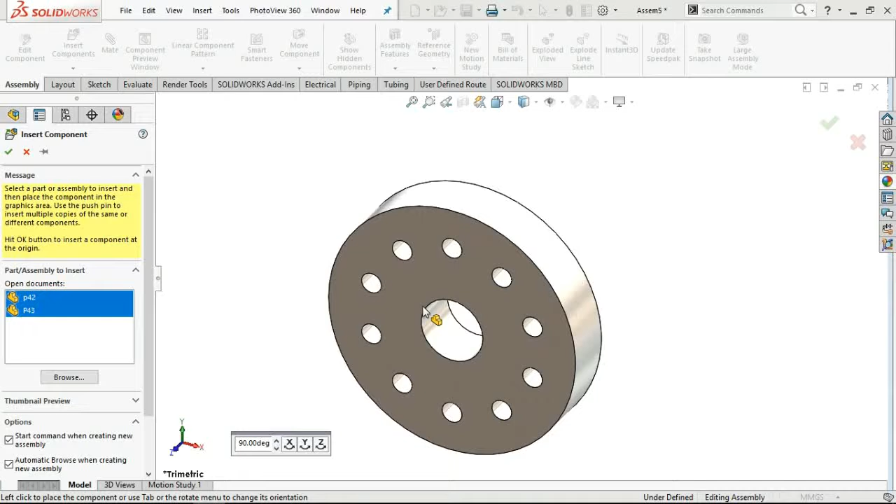Now I'm going to show you another command, or trick, in Assemblies: sub-assemblies and Treehouse. First I'm going to show you how to use sub-assemblies and how they can help you when assembling different bodies.

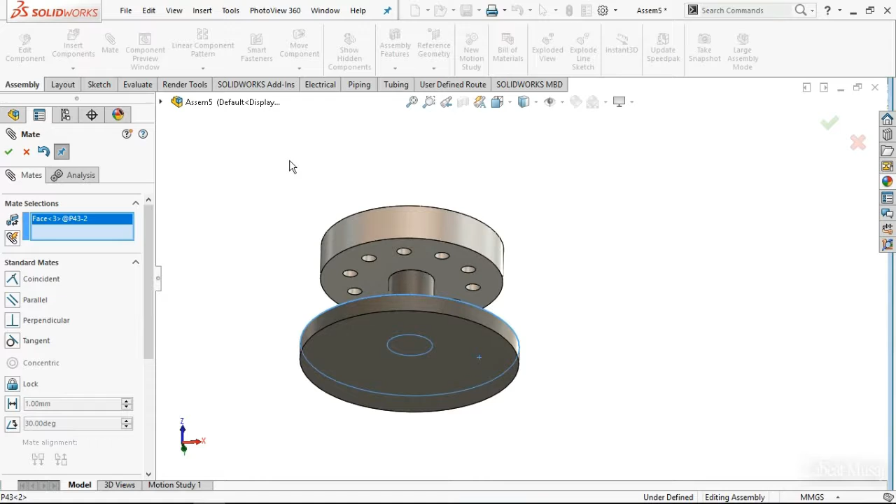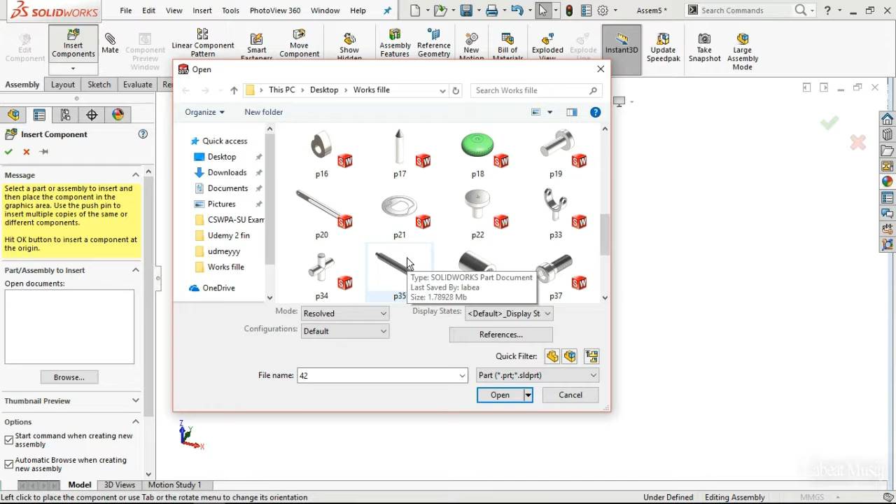So I just inserted these two parts and now I'm going to mate them. Just click the inner part and the outer part of the cylinder, and now I'm going to mate these two faces. This is all done.

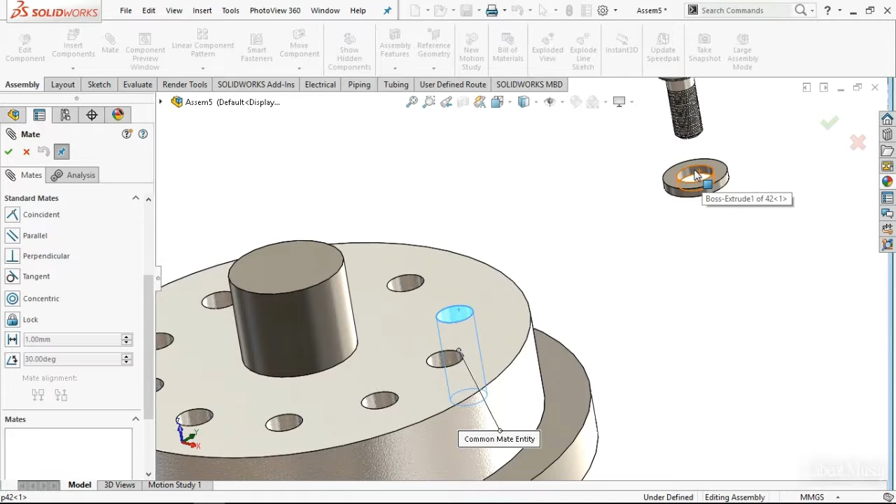Now I need another part, or two other parts. So this would be it, and the other one is a bolt. Now I'm just going to insert these two parts, and what I'm going to do with them is mate them and assemble them with the existing bodies on my working sheet.

So this is the first way you can do it. You can just mate these bodies one by one, and after this I'm going to show you how to use sub-assemblies and how they can help you. So I'm just going to mate these bodies one by one.

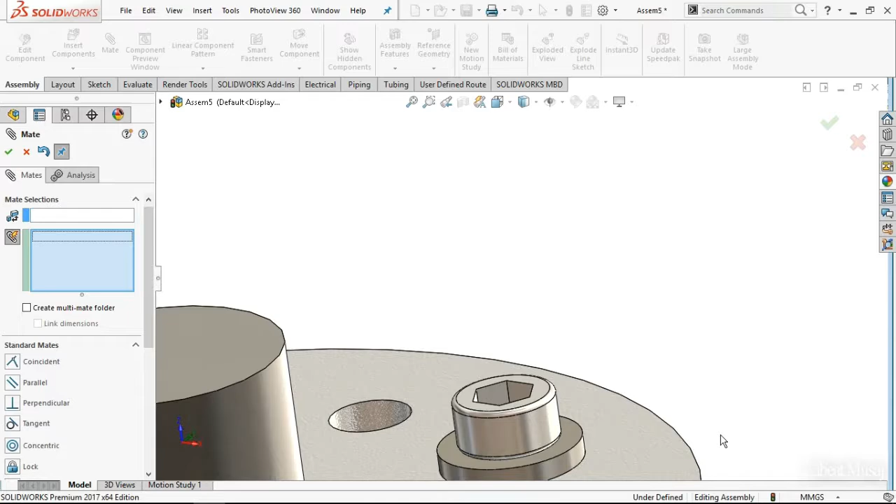And now these faces. So now we have these parts, and I'm just going to assemble them with these tiny holes that we have.

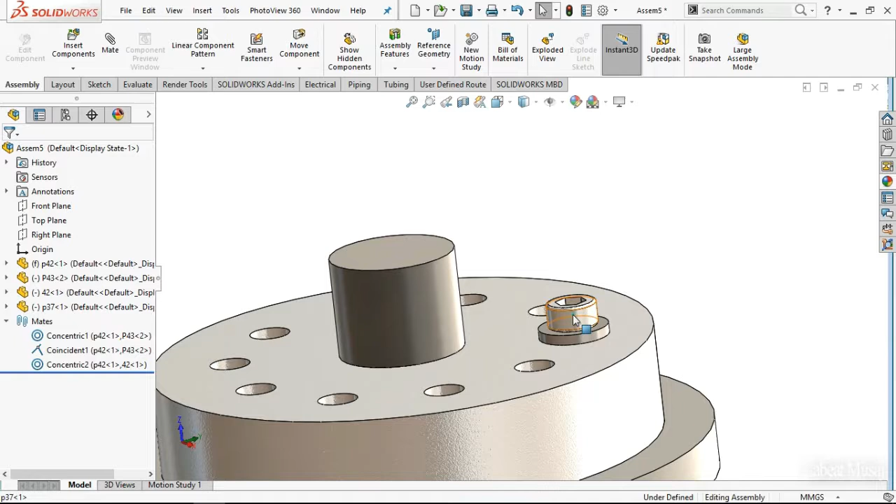Now I'm just going to delete these mates so I can show you how to use the sub-assembly part. Now I'm going to separate these - let me delete this one too. Now they are not mated, they are kind of independent.

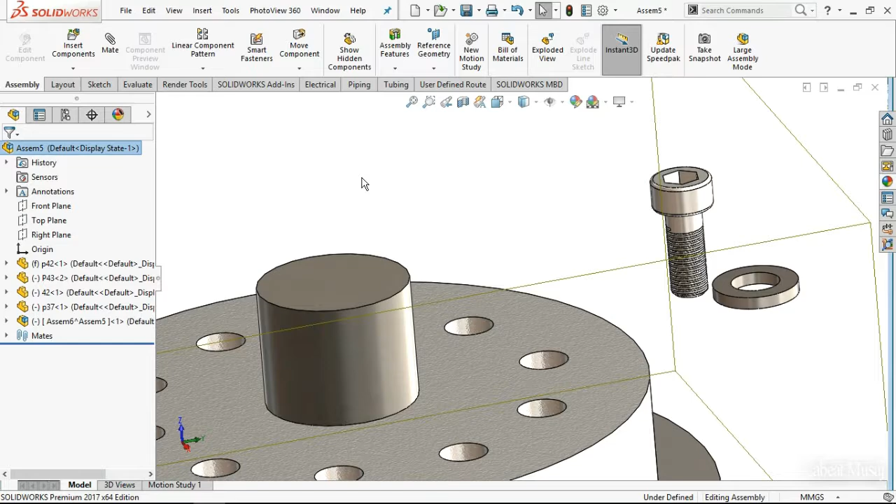So what you can do is first create a sub-assembly with the bolt and this small cylinder, and then you can just insert them in the main assembly.

So what you've got to do is just select the parts, this one and this one, and then drag them down to the other assembly. So this is pretty easy.

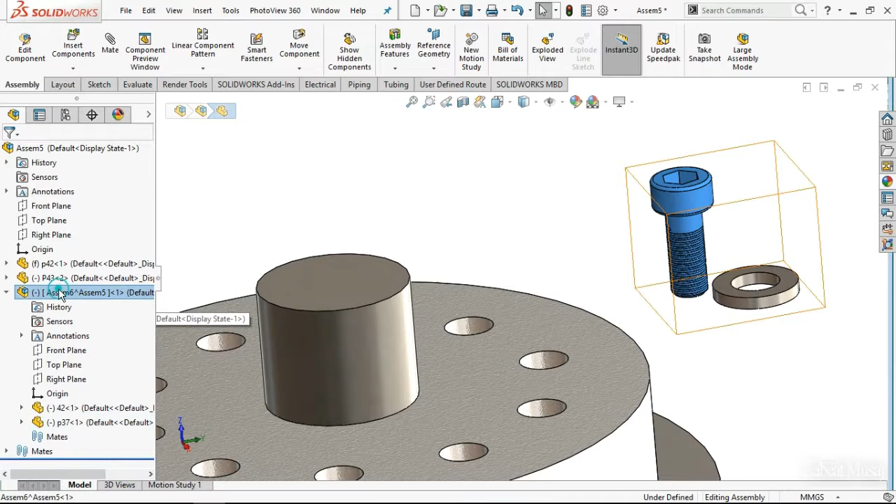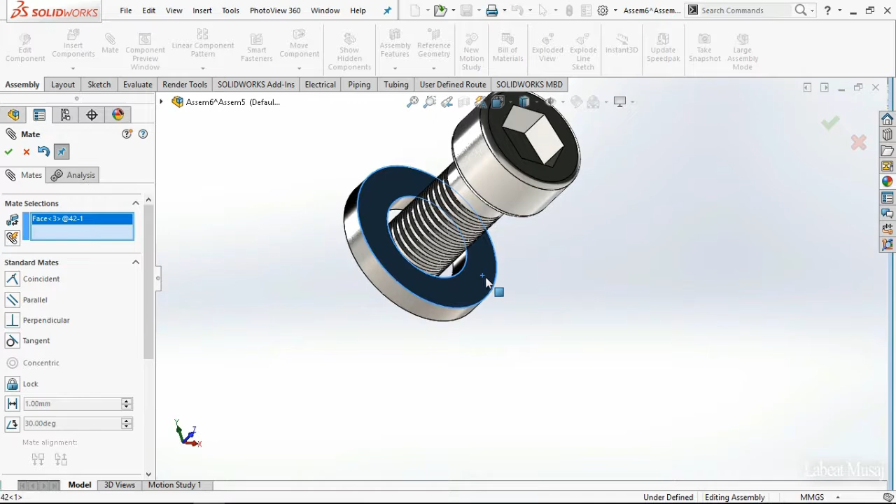Now you have these two parts, and what I'm going to do is just open the sub-assembly. So now we have a sub-assembly here, and I'm just going to mate these two. So this is basically it. Another one.

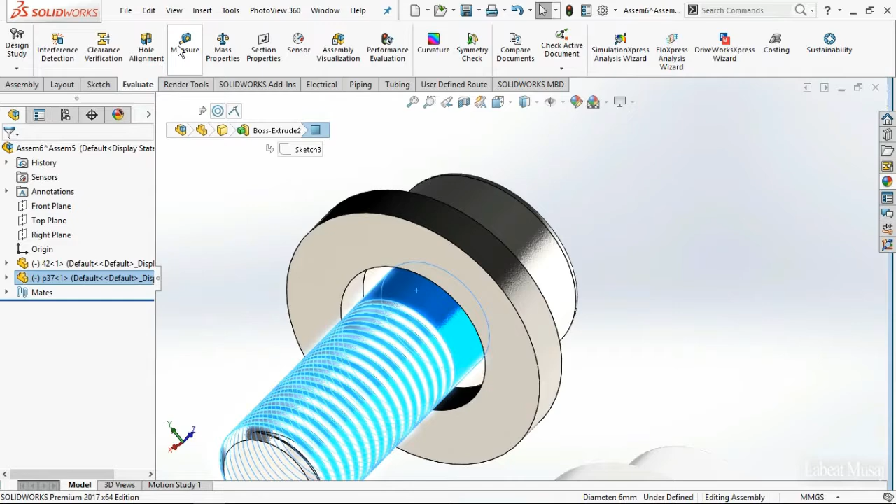As you can see, the size doesn't correspond, so let me change the inner diameter. I'm just going to measure how much this diameter is - it's 6 millimeters.

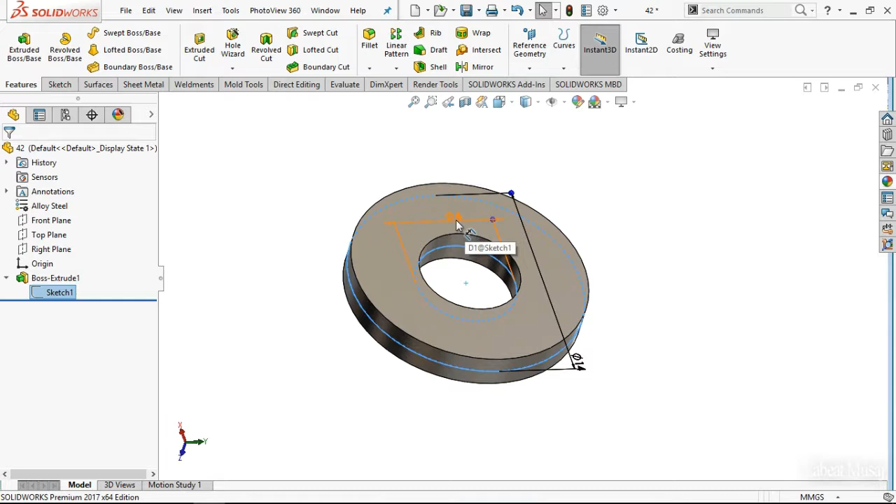Now I'm just going to edit the inner circle by editing the sketch. Now we just go rebuild and it's all done. You could change the dimension here as well - it's your choice, you can change it however you like.

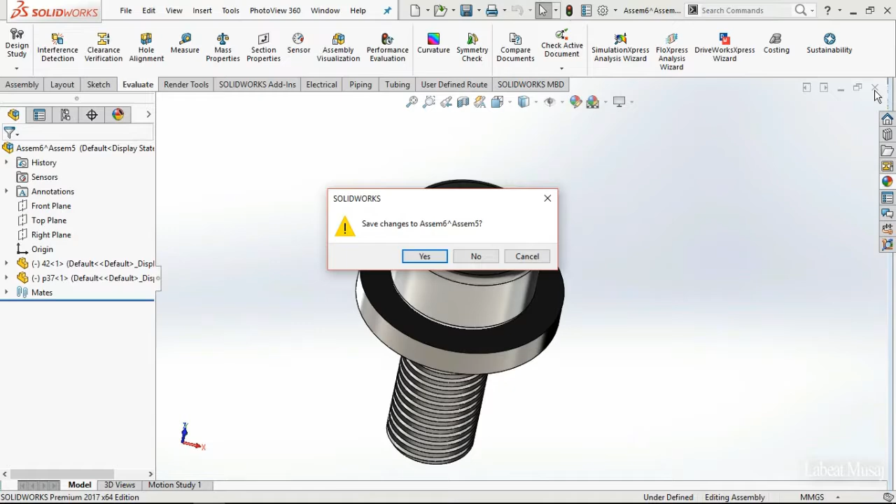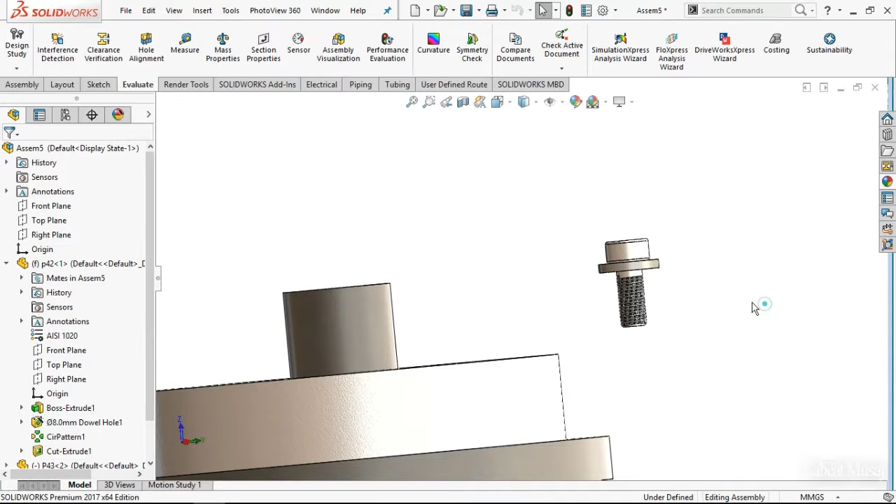So now we have this sub-assembly, and I'm just going to save the changes. What I can do now is assemble these parts that I assembled earlier with the main assembly. So I'm going to mate these holes with the bolt parts with a screw.

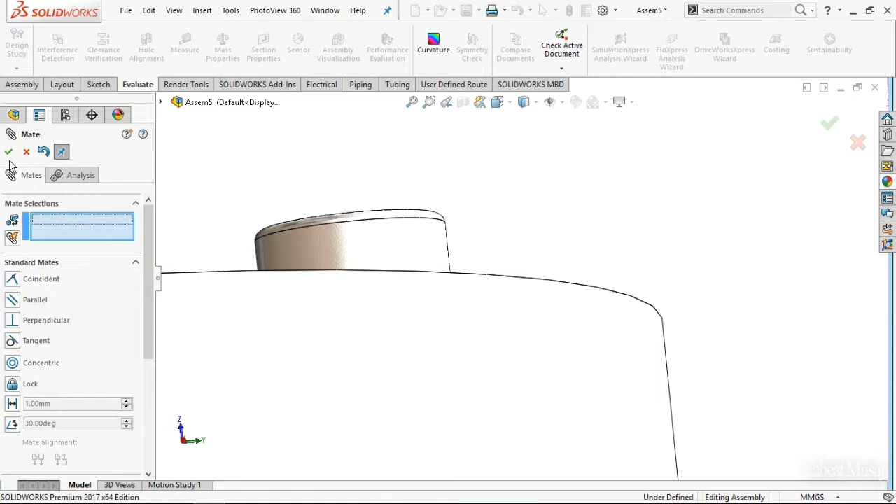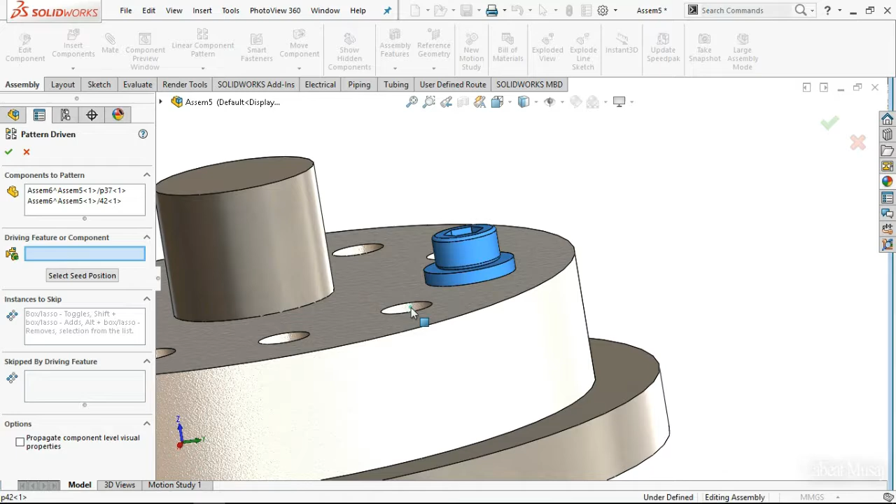So this is it, it's pretty easy. Now what you can do is pick a circular pattern, or pattern driven - it doesn't matter - and you have these bodies copied all over the holes. So this is it. Now I'm going to save this assembly.

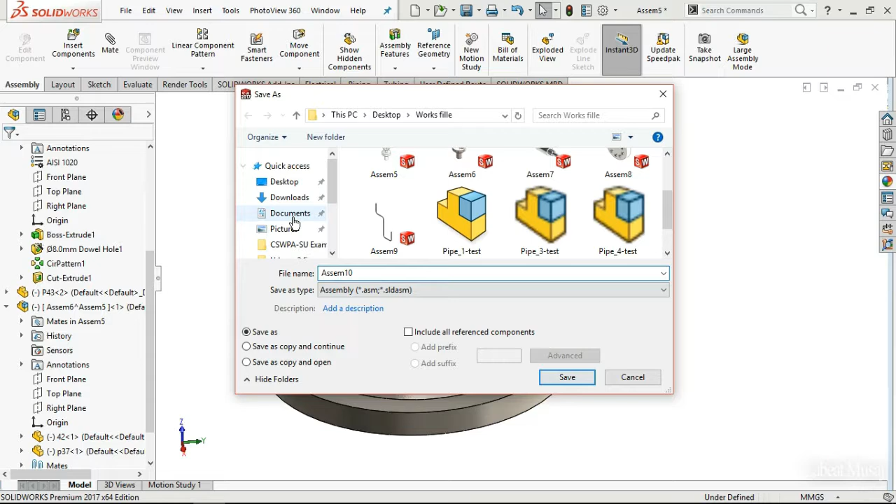Now I'm going to show you how to use the Treehouse tool on SolidWorks. Within the start command, you can search for the Treehouse tool. Now I'm just going to find the SolidWorks part - here it is, we have the SolidWorks tool, and there is the Treehouse.

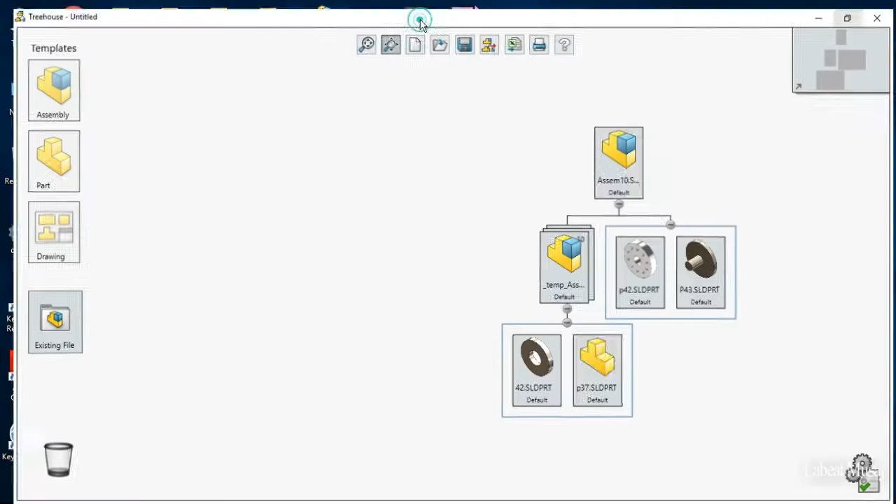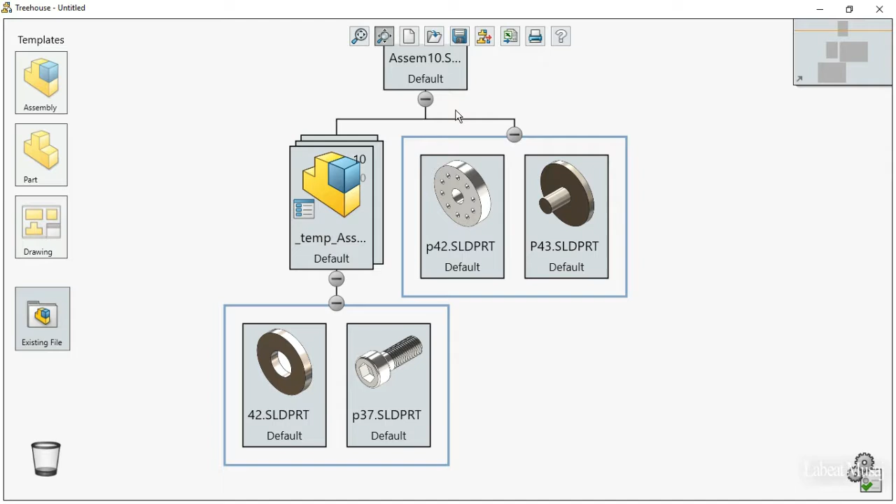You just click the Treehouse and a window opens, and what you've got to do is drag the assembly in to create a treehouse with it, and it opens the assembled part. You can see we have the sub-assembly here that we just created earlier, and then the two main parts, and this is how it looks like. You can also insert a drawing or whatever you like.